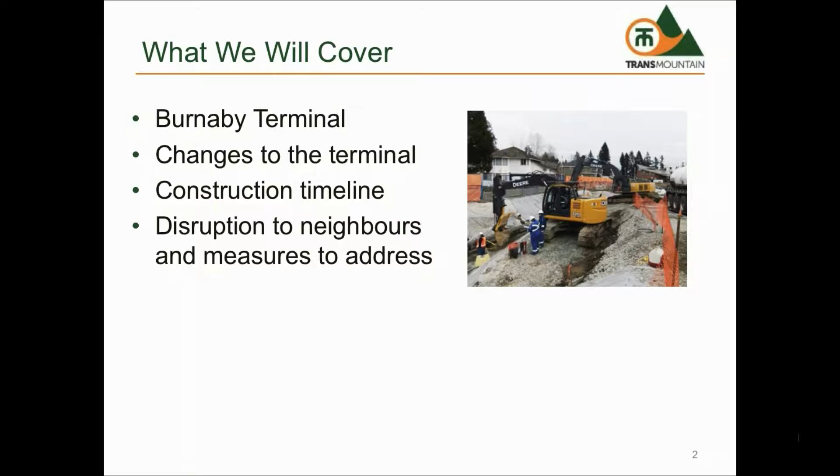The purpose of the Burnaby Terminal today is to serve local markets, which include temporary storage of oil destined for the Chevron refinery and a distribution point for refined products destined for the Lower Mainland. The purpose of the terminal is also to provide temporary storage of oil destined for loading onto vessels at Westridge for export to other markets.

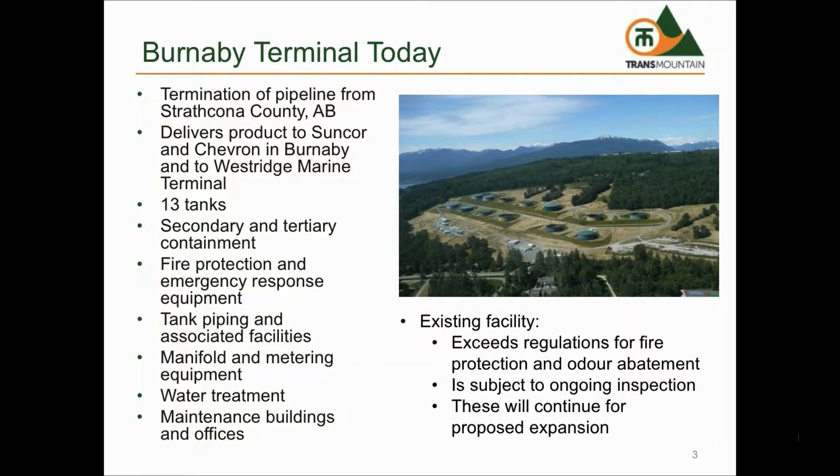There are currently 13 tanks at Burnaby Terminal that have a combined storage capacity of 1.6 million barrels. All tanks have floating roofs and 6 tanks have closed domed roofs, and all tanks are painted green to minimize appearance on the landscape. The existing facility exceeds regulations for fire protection and odor abatement and is subject to ongoing regulatory inspection, and these measures will continue with the proposed expansion of the facility.

With the proposed expansion for Burnaby Terminal, there will be 14 new oil storage tanks constructed. One of the existing tanks will be demolished to make way for new tank construction, resulting in a total of 26 tanks after the expansion, with a combined storage capacity of 3.9 million barrels.

All tanks, both existing and new, will be equipped with overfill protection devices for measurement of liquid levels and automated valves. All tanks will also have secondary containment berms, and new tanks will also have floating roofs and fixed domed roofs with equipment to control vapors and emissions for odor control.

Tank color will be determined with public input, and it should be noted that lighter colors reduce the amount of vapors, emissions, and subsequent odors. There will also be a new firewater tank constructed to replace the existing firewater reservoir.

For new piping and pipelines, there will be a new 36-inch delivery pipeline that will enter the facility from the south, piping that will connect the tanks to pipelines via valve manifolds and additional mechanical and pumping equipment. There will also be upgrades to the existing control and emergency shutdown systems. For delivery of product to Westridge Terminal, there will be a tunnel constructed that will contain 2 new 30-inch pipelines.

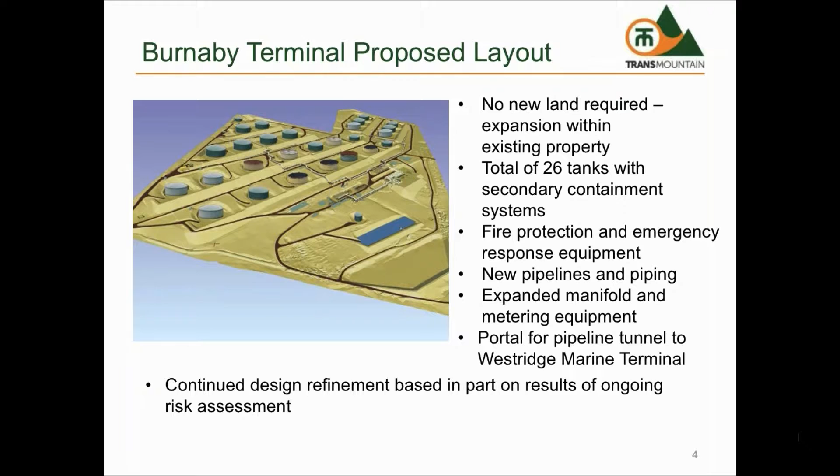No new land is required for the expansion of the Burnaby Terminal. All expansion will take place within the existing footprint of the terminal.

Some of the construction activities that will take place during expansion of the Burnaby Terminal will include relocation of existing underground pipe and electrical cables, demolition of 1 tank, construction of 14 new oil tanks and 1 firewater tank, earthworks for construction of foundations for new tanks, secondary containment berms, and associated piping.

Installation of piles to support new equipment and pipe racks, construction of an enhanced stormwater management and treatment system, installation of a new electrical substation which will be connected to the existing electrical grid, and construction of a portal for the tunnel to Westridge.

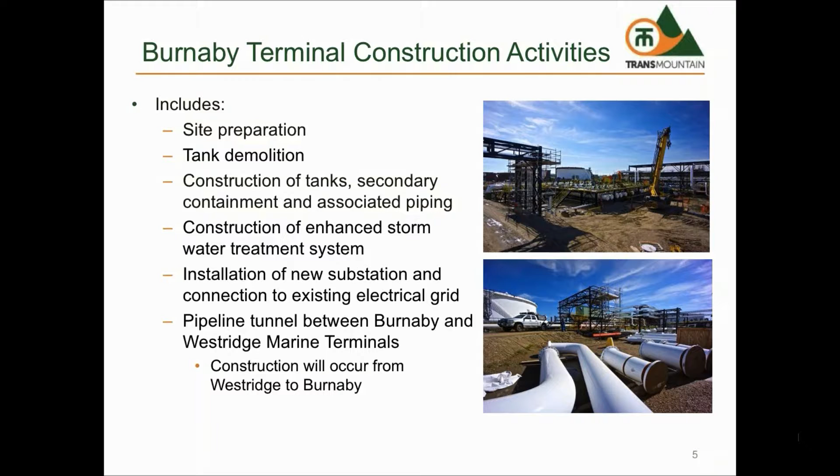Our current construction schedule, which is subject to ongoing refinement and receiving of all approvals, has construction activities for Burnaby Terminal expansion taking place in 2017, 2018, and 2019. In 2017, we will begin site preparation activities to prepare for the expansion, including tree clearing and relocation of existing underground pipes and electrical cables. We will also begin construction activities related to the expansion in 2017, including earthworks and development of the portal for the tunnel to Westridge.

In 2018, we will continue with construction activities related to the terminal expansion, including construction of tank foundations and tank construction, installation of underground piping systems and electrical systems, and construction of new firewater and foam buildings. In 2019, we will finalize construction activities, including installation of pipe in the tunnel to Westridge and backfill of the tunnel. In-service for the new expanded facility is targeted for December of 2019.

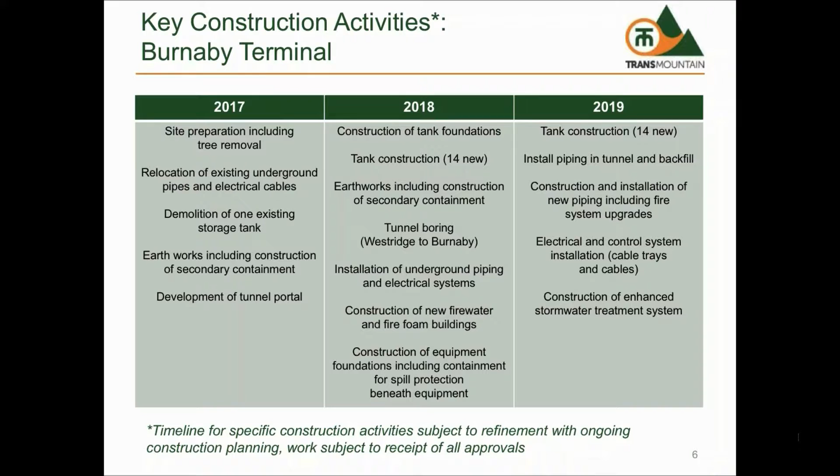There has not been a storage tank fire at the Burnaby Terminal in the more than 60 years of operations. Storage tank fires are very rare worldwide, even though there are hundreds of thousands of tanks in service.

Although a storage tank fire at Burnaby Terminal is extremely unlikely, given the numerous engineering, operations, and maintenance controls that are employed to prevent fires, Trans Mountain must nonetheless be prepared to respond to the possibility of fire.

Fire planning at Trans Mountain facilities includes 5 key elements. Prevention, which focuses on fire prevention and avoidance of fire hazards through design, operating procedures, inspection, and training. Preparation, which includes emergency planning, training, and regular practice through emergency exercises. Detection, through fire detection and fire suppression systems. Response, which includes Trans Mountain personnel complemented by trained responders and contractors providing 24/7 emergency response. And maintenance, which includes well-documented programs for controlling, tracking, and recording maintenance activities on facility equipment, complemented by regular NEB audits and inspections.

As part of the proposed Trans Mountain expansion project, Kinder Morgan Canada will be enhancing its emergency management plan to build on existing emergency response capacity and meet the needs of the expanded facility.

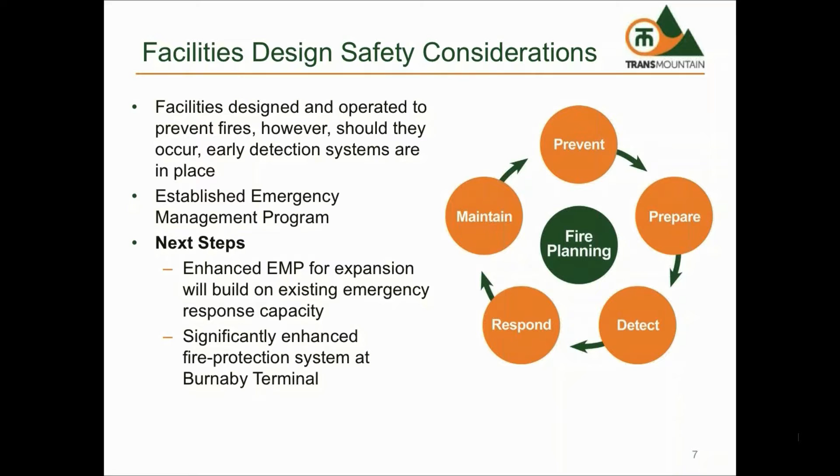The new fire protection systems at the expanded facility will exceed the requirements of the applicable codes and standards for storage tank terminals. During construction of the Burnaby Terminal, Trans Mountain will work to minimize disruptions to neighbors and communities by limiting noise, dust, traffic, and lighting.

Noise control plans will be developed that will identify techniques to minimize noise impacts, including equipment selection and maintenance, use of enclosures and baffles, and timing of construction activities.

Dust will be controlled by utilizing measures such as speed of vehicles, site watering, and use of dust suppressants. Traffic impacts will be minimized through development of site-specific traffic management plans, identifying traffic routing and modes of transportation. As an example, transportation of construction workers to the construction sites will be by bus from remote sites to minimize the amount of traffic on local roads around the facilities.

Lighting will be required to ensure worker safety and job site security. However, lighting impacts will be minimized by use of directional lighting, lighting shrouds, and ensuring that lights are turned off when not required to be in use. In some cases, lights will be left on at night for security purposes.

Construction activities will typically occur 5 to 6 days per week for 10 to 12 hours during the day. In special circumstances, more nighttime or weekend hours may be required to complete critical construction activities. During construction, Trans Mountain intends to meet or exceed expectations outlined in applicable local and provincial permits and bylaws where practical.

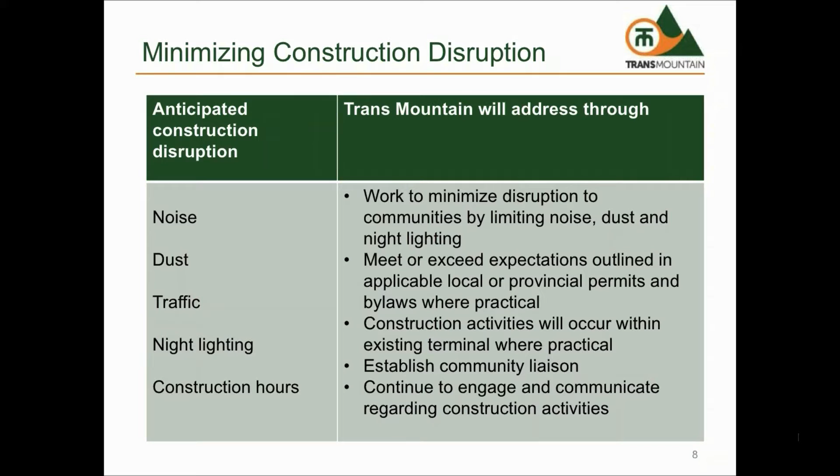During operations of the expanded facilities, safety of community, employees, and protection of the environment will be our highest priorities, as it is now. We will work to minimize impacts to our neighbors, communities, and the environment during operations by minimizing odors and emissions through capture of vapors from all new tanks and regular air quality monitoring and reporting.

Having adequate oil spill response measures in place, including secondary containment around tanks. Minimizing noise through use of buildings and baffles. Minimizing lighting through design of lighting systems that direct lighting to work areas only. And minimizing impact to surrounding water by proper stormwater capture and treatment, including the use of advanced water treatment equipment and systems.